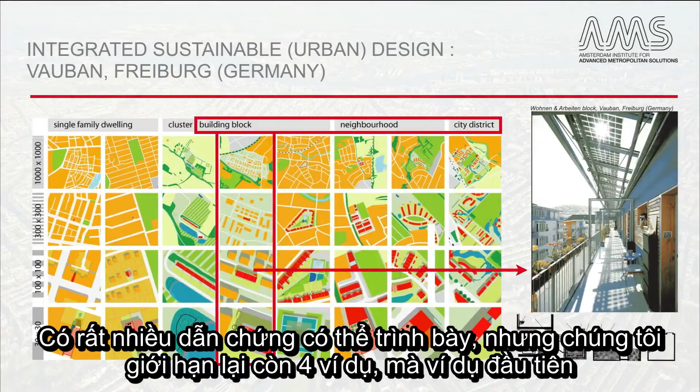In this video, synthesis and integration of different elaborations on finding metropolitan solutions will be given by showing how some reference projects, or best practices, dealt with it. There are many to show, but we will limit it to 4 examples, of which the first one will be elaborated more in detail.

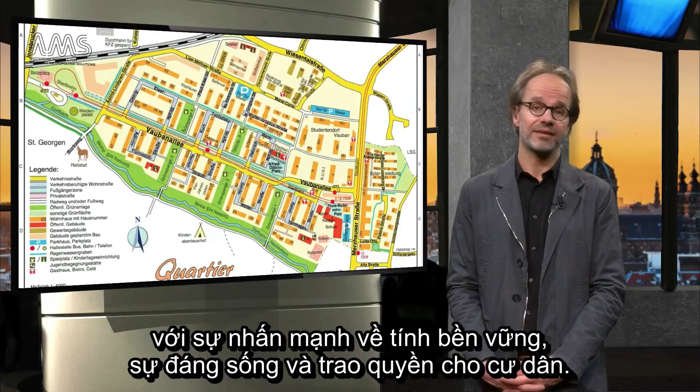This one concerns the residential area in Freiburg, Germany, known as Quartier Vauban. The area concerns a former French military base, redeveloped as a residential area with strong emphasis on sustainability, livability and citizen empowerment. The plan has a spatial layout based upon optimization of public transport, in this case a tramway in the spine of the district, with emphasis on leaving cars out of the residential streets as much as possible.

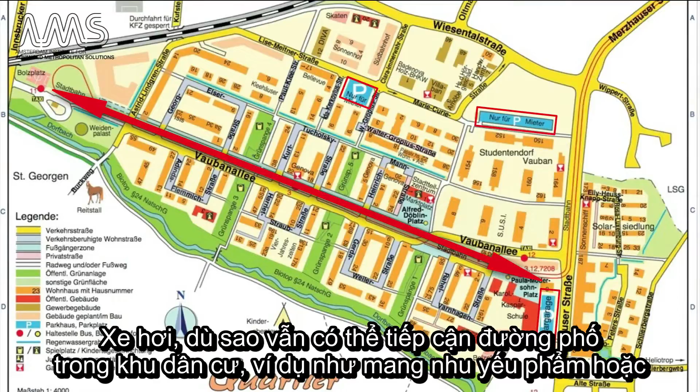These strategic choices, shown here in the back of the picture with the glass parking garage, create a lot of space for users and services. Cars, however, are still able to access residential streets, for instance to bring groceries or pick up people. This is done via alternating streets in U-shape, accessed through the central spine of the district, not making any transit through the district's residential streets possible.

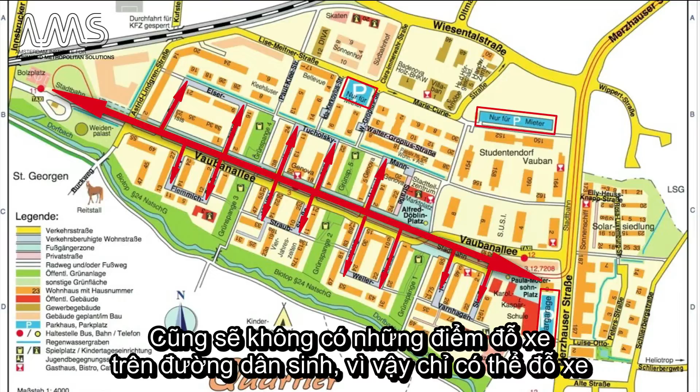Also, there are no parking plots available in these residential streets, so parking can only be temporal. Perpendicular to these residential streets, providing the shortest and fastest routes through and outside the district, pedestrian and cyclist routes are situated along green axes.

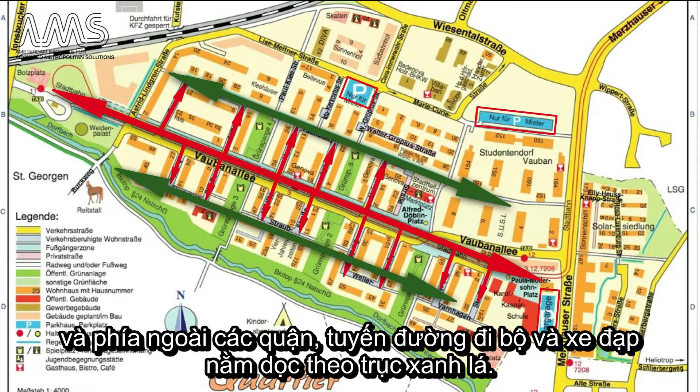The result: spacious streets with little to no cars, lots of green and appreciated environments which the residents care for, providing room for children playing and room for green and sustainable technologies to be integrated. But above all, it provides safe and livable outdoor environments.

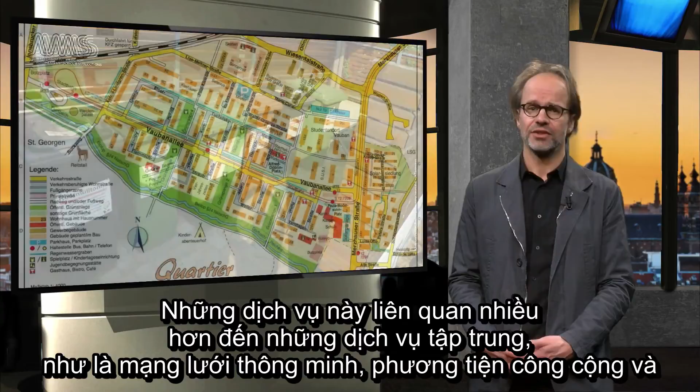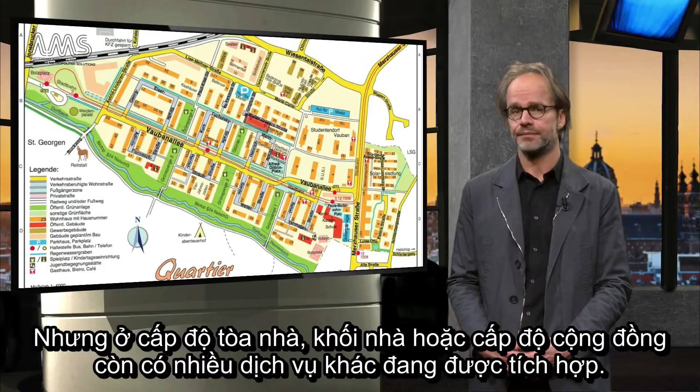These services concern more centralized ones, such as a smart grid, public transport and amenities. But on the building block or community level, several services are also integrated. Take, for instance, this mixed-use block called Wohnen und Arbeiten Vauban, in which apartments with workshops and working places are integrated, but which also includes an innovative wastewater treatment concept with energy and nutrient recovery.

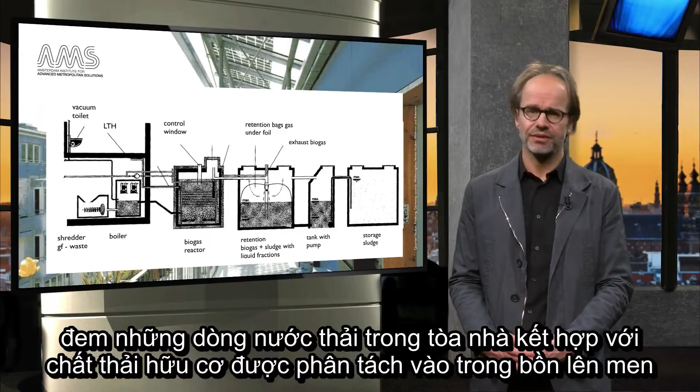This so-called anaerobic system takes wastewater streams from the building together with shredded organic waste, and in a fermentation tank creates biogas, which in turn is used in the houses and for production of heat and electricity in a combined heat and power plant.

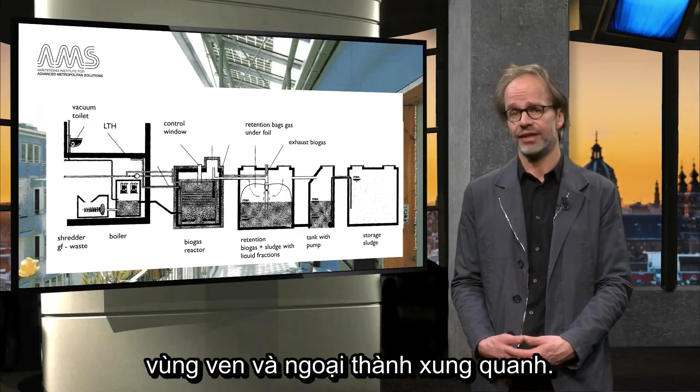Remaining sludge with some essential nutrients is subsequently used by a farmer in surrounding peri-urban and rural areas. The system components are partly integrated in the outdoor green space, as well as in the basement of the apartment building, as you can see here.

This makes outdoor living environments not only nice green spaces to live in, but also integrates functional systems and significantly provides space for residents and children to recreate. But at the same time, as stated before, the district is quite dense.

This is in particular the case next to the central axis, the central spine, and next to amenities and public transportation. Here, multifunctional and multi-layered solutions have been created, with shops and working places below and houses with rooftop gardens on top of that.

And as you can see, the roofs of these houses are covered with photovoltaic panels to generate electricity. These surfaces are maximized to improve the amount of electricity generated, while leaving enough outdoor green space for residents.

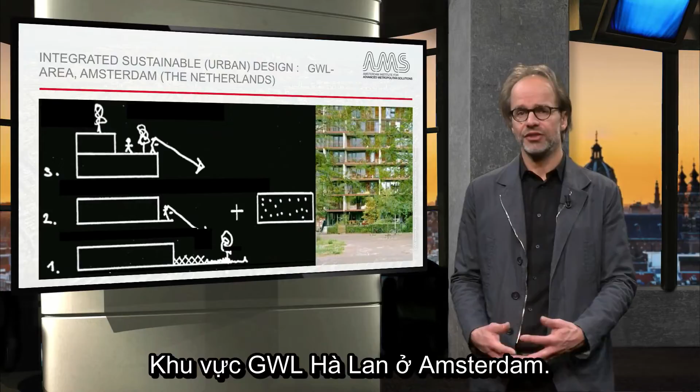Which brings me to the second reference project of this video, the Dutch GWL area in Amsterdam. Here, an even more dense residential area mixed with some working places has been realized inside the city on a redeveloped former drinking water production area.

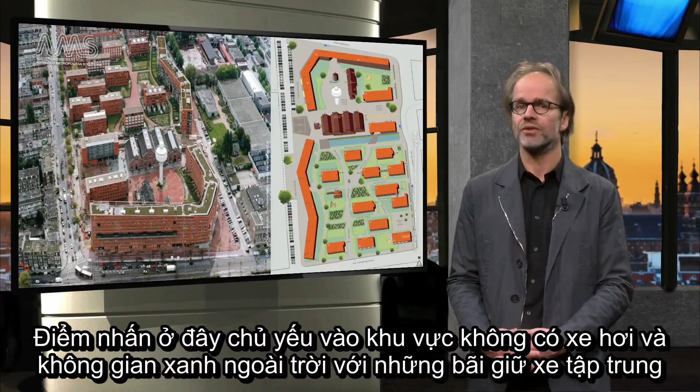Multiple story apartments are designed in such a way that good functional and visual connections with the green outdoor spaces are secured. Emphasis here was also on a car-free and green outdoor environment, with centralized parking facilities and above all excellent public transportation and pedestrian and cyclist routes. At the same time, existing buildings of the former functions are integrated in the plan.

The alternating blocks in the inside area, interspersed with green community gardens, create nice and functional green outdoor spaces. Separations between semi-private or communal and semi-public spaces are realized with green hedges to avoid hard separations. The result is, among other things, cherished community gardens.

The Amsterdam project relates to the third project in this video, the district Hammarby Sjöstad in Stockholm, Sweden. This district is larger, but similar in density. And besides almost closed inside green areas for residents similar to Amsterdam, here the different communities and neighborhoods are built around a centrally positioned water area.

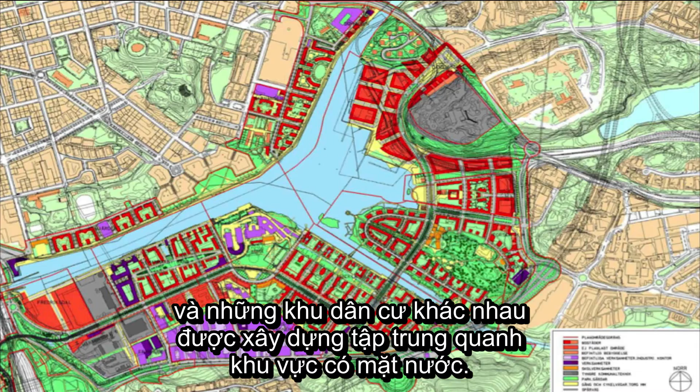On an even larger metropolitan scale, you can see that such an approach, with other neighborhoods to be developed, is realized throughout the city as if it were a ring. Of course, this is also a result of available space in this ring outside the inner city, something which is seen more frequently in other metropolitan areas as well.

Inner cities more and more do not offer sufficient space for a new building program, while these ring areas just outside inner cities, often still dominated by water or road infrastructure, with non-functional layout and industrial functions, provide huge opportunities to match spatial, social and environmental improvements.

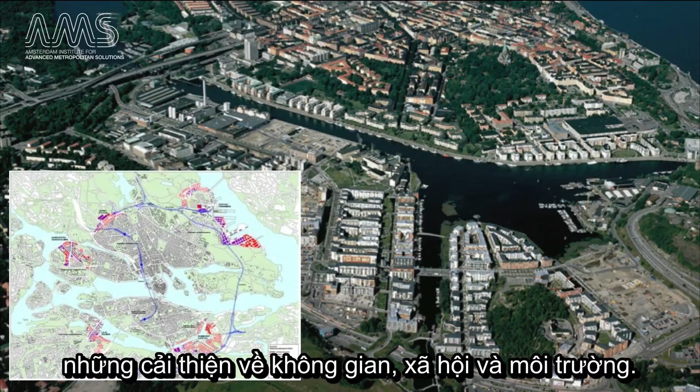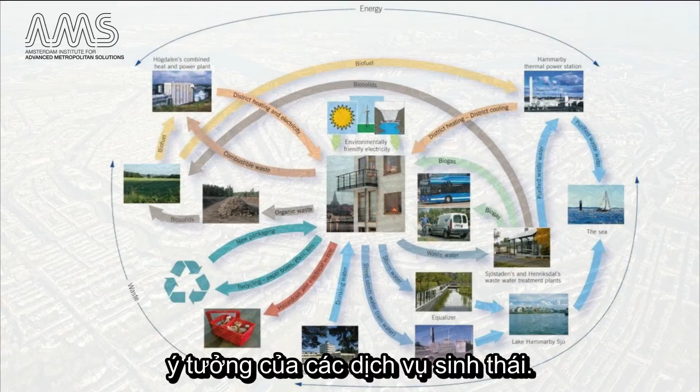Hammarby Sjöstad is also an excellent example of the concept of trying to include and maximize ecosystem services, based on dense but lovely environments to live in that provide all kinds of additional functions.

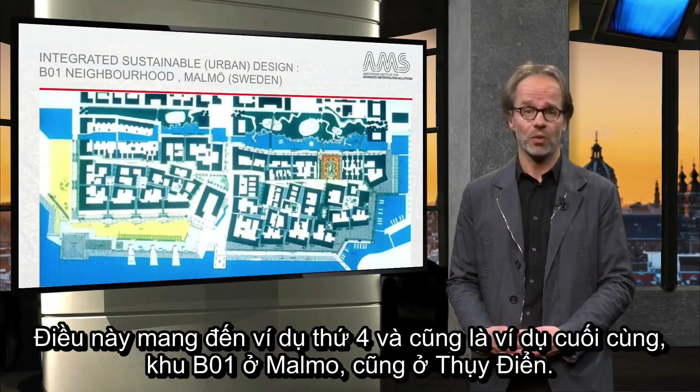And this brings me to the fourth and last example in this video, the B01 neighborhood in Malmö, also in Sweden. Similar to Hammarby Sjöstad and GWL Amsterdam, this also concerns a compact urban area development, a redevelopment, which tries to integrate multiple ecosystem services with green, car-free outdoor living environments.

But also the inclusion of a green-blue instead of grey rainwater infrastructure, with infiltration ponds integrated in the streets, and with so-called bioswales and green ponds for treatment of grey wastewater.

This all starts, of course, at the scale of the individual houses and streets, where rainwater infrastructure is carefully designed and disconnected from the wastewater infrastructure, leading to these decentralized facilities integrated in public space for the treatment.

In the end, such an introduction of blue or green-blue infrastructure supports many qualities in the living environment, while addressing sustainability and providing easier ways to cope with foreseen and unforeseen changes in precipitation due to climate change. But above all, it provides nice, livable living environments in relatively dense settings.

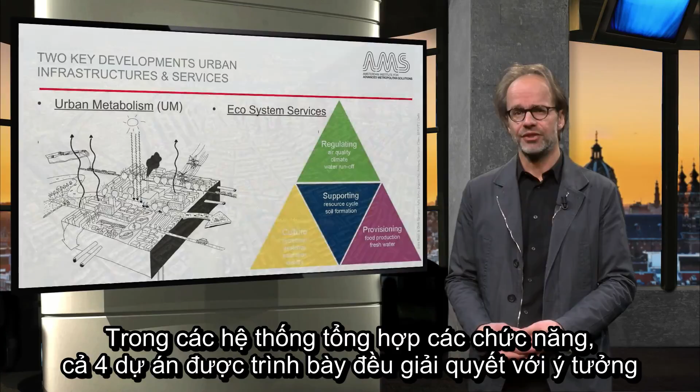In their synthesis of functions, all four projects presented address the concept of urban metabolism, while providing ecosystem services to support both the communities as well as business cases and sustainability, and therefore can be seen as pioneering in this field.